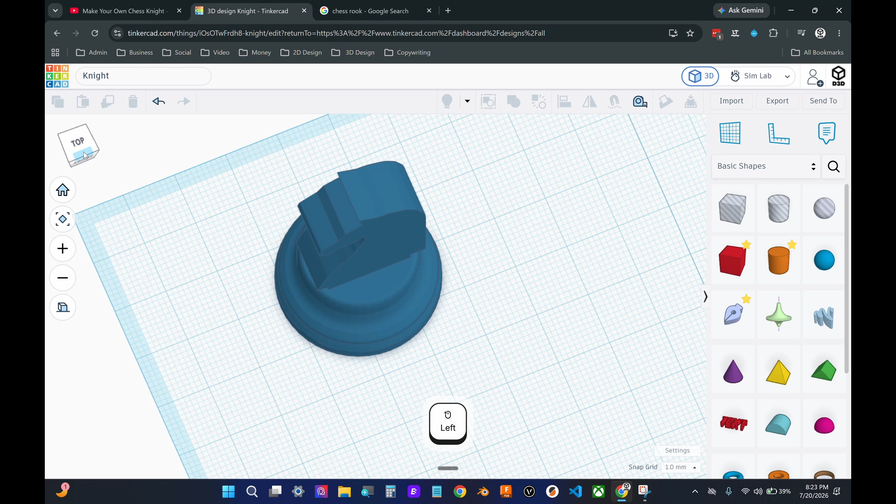And now let's come over to my knight design, because we want it to be roughly the same size. Go to a top view, grab the measuring tool, go from there to there. It looks like about 30 millimeters in diameter, so we can work with that.

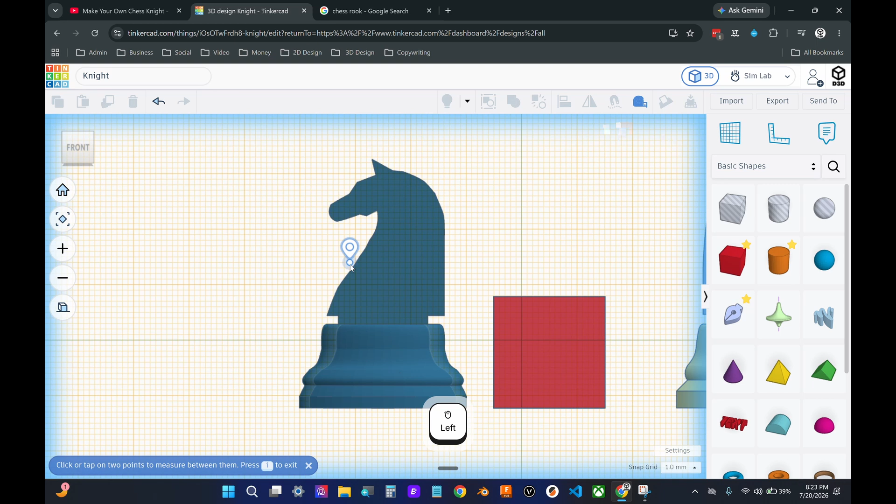And then I'll get a height measurement real quick, just changing the work plane and then measuring from roughly the top to roughly the bottom. About 45 millimeters, so 30 millimeters in diameter, 45 millimeters tall, and then real quick we'll grab just kind of what it is in the middle. 17, great. And now we're going to go to tinkercad.com.

If you don't have an account, you're going to have to log in, but eventually you'll get here and then you'll click create and then 3D design.

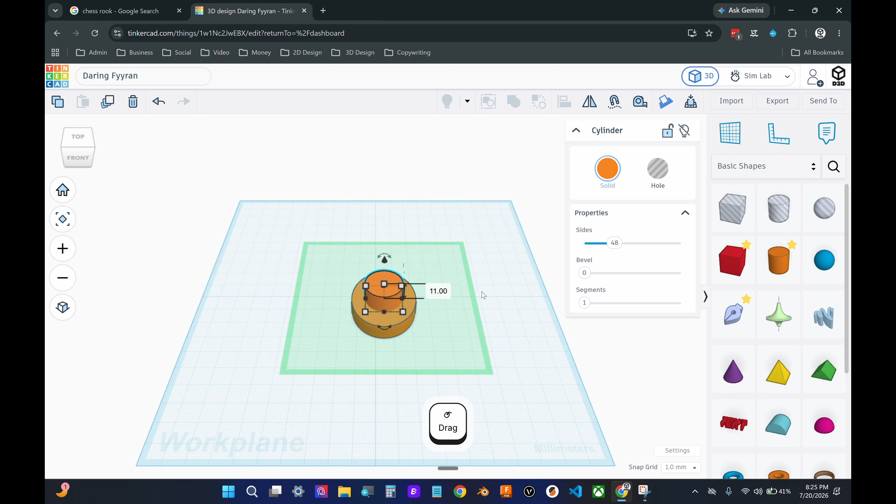So what you could do is you could just grab a bunch of discs and stack them on top of each other like this, and you'll get to a rook eventually that way, but there's a faster way that we're going to do in this video, and that is to use the Revolve Tool.

So we're going to throw the Revolve Tool on the work plane and then just start drawing our outline. The first thing you want to note is your base needs to be exactly half of what you want it to be eventually, because when we revolve it, it's going to double the diameter. So if the diameter right now is 15, that will give us our desired 30 millimeters eventually.

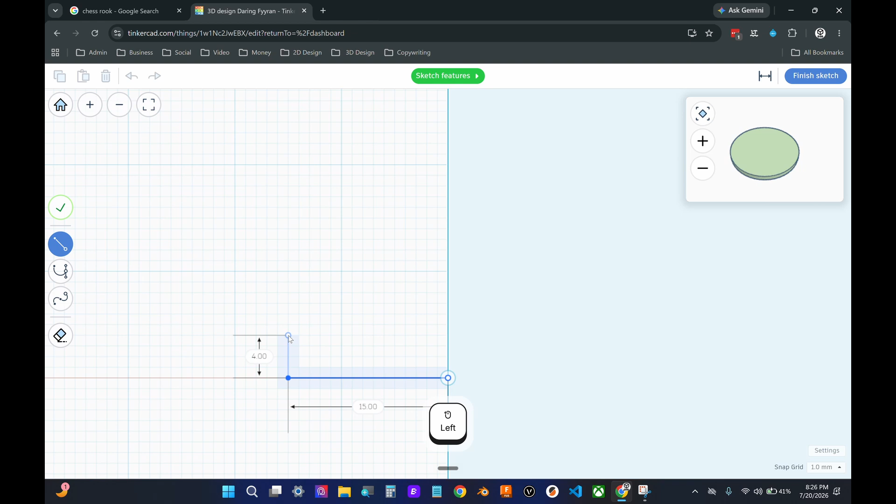So we'll click here, we'll drag up 4 millimeters and then over 2.83, and then out a little bit, back in a little bit.

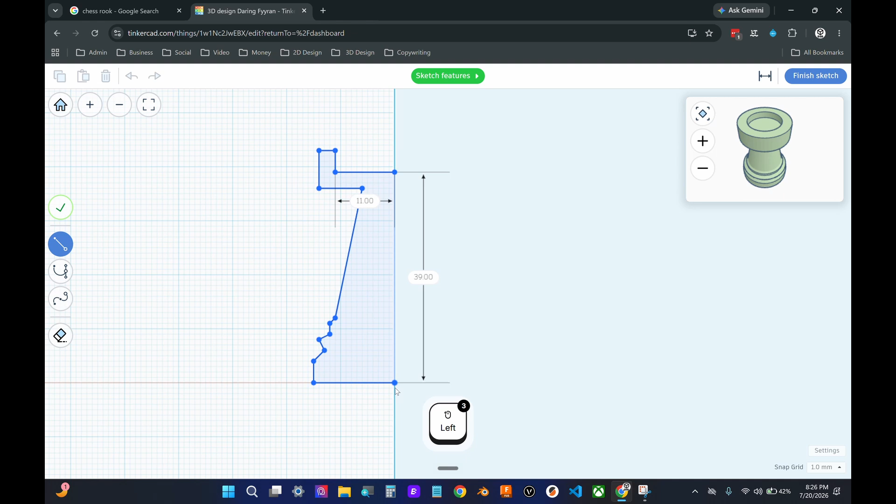And then we'll go out a little bit more and back in a little bit more, and then we'll just go up for a while, then out for a while, then up for a while, then over, because we could just do this here and then go down, but we want that crenellation, so we're going to go down first, then over, then down. Okay, looks like we're almost at our 45 that we're going for, so I'm just going to go ahead and set that to be 45, and then we'll drag the whole thing up.

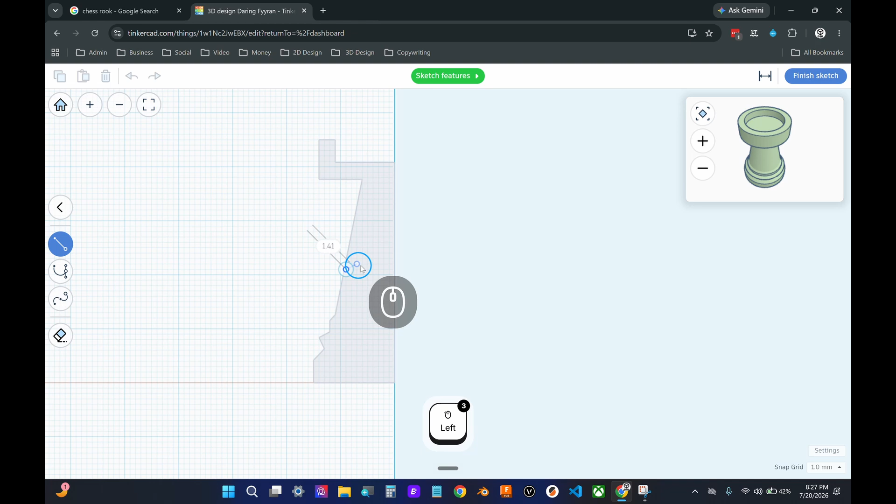So now we've got an eventual diameter - right now it's half the diameter, but an eventual diameter of 30 millimeters and an eventual height of 45 millimeters. And if we want to, we can grab another line to check how long this is. This is 9, times 2 would be 18. So yeah, we're roughly where we want to be size-wise.

This part looks a little funky up here, but that's okay, we can fix that. Okay, so I'm going to zoom in, select this line, and then we're just going to kind of go ahead and move some things around.

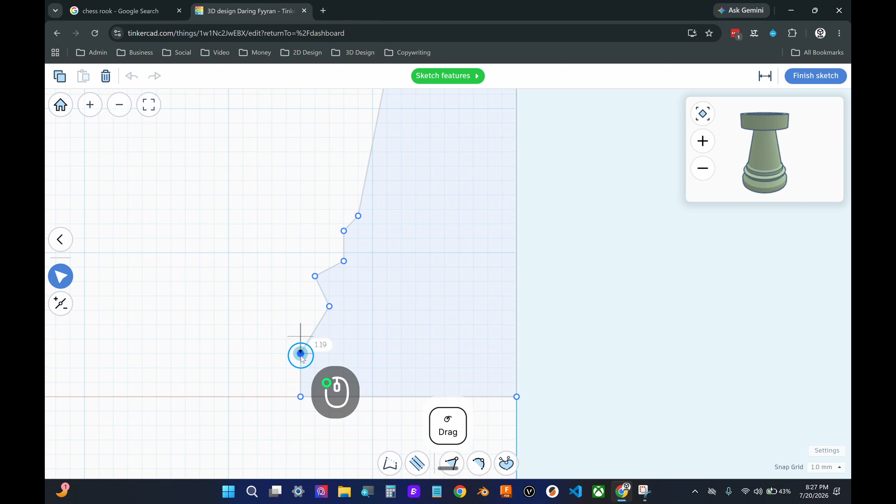I like this height actually, maybe I'll make it a little bit smaller. Yeah, we'll do that, we'll drag this over a little bit. Actually, I'm going to change my snap grid to 0.1 because it's easier for stuff like this. This isn't super scientific, it's just kind of what you like.

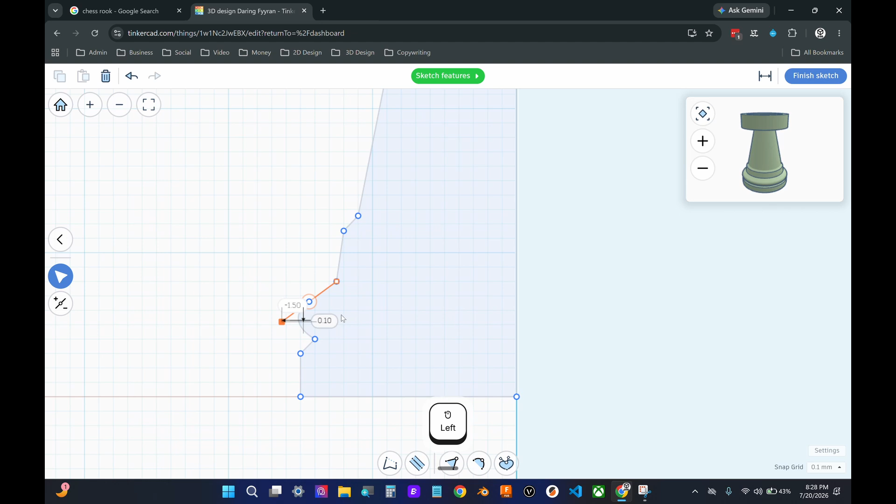And then I'll select this middle dot and I'll curve it by clicking this, and you can kind of grab the handles and change how exactly you want it to look. You could do this option where you can adjust each side individually, but for this I'm going to go with the ones that kind of follow each other. So just kind of mess with that until you like how it looks. You can always come over here and zoom in and look around. I'm liking how that looks.

Okay, so now we'll come up a little bit. Do this, mess with this a little bit.

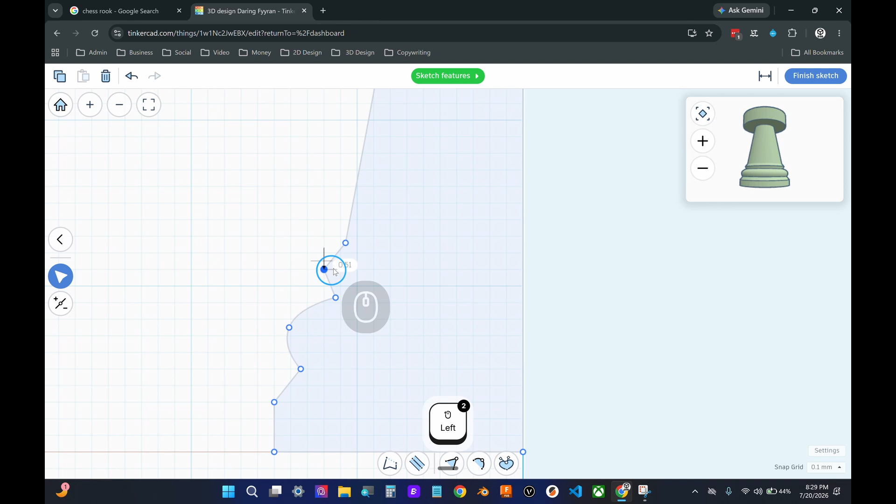This is like a smaller ridge from what I remember. Yeah, let's look at that. So this is a much smaller ridge, going more in the direction with the other diagonal bit of the piece. So we'll do this a little bit more, kind of fill this out.

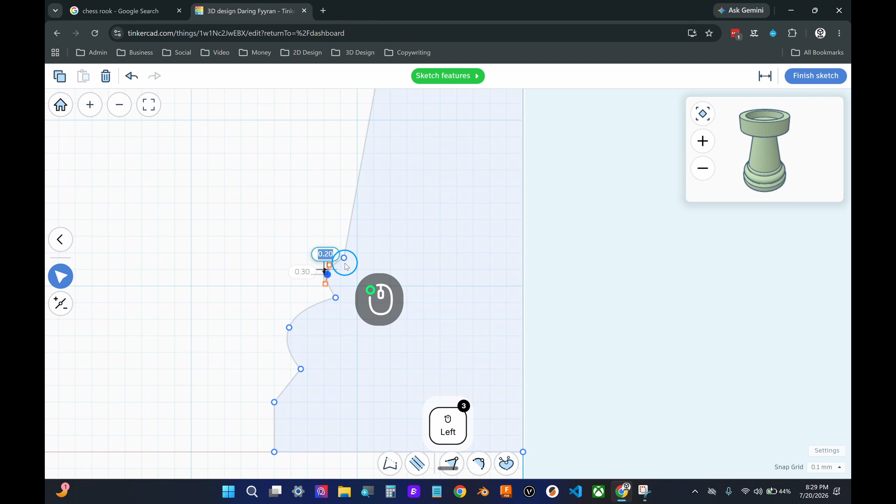Am I still liking how this is looking over here? Yeah, it's okay. And then round that out, move that in a little bit probably. Maybe move this piece in if I can grab it. Yeah, so that's looking pretty similar to what we've got right here, maybe a little bit more squashed.

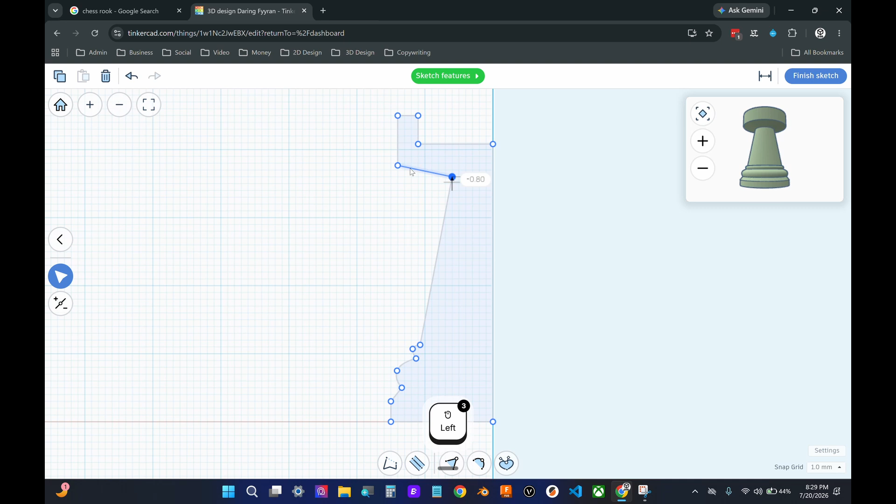Now we're gonna come up here to this part. I feel like this might be a little thin. Yeah, so I'm gonna drag this down. Actually, this is a time where I'm gonna switch my snap grid back to 1 so I can snap, and drag that down to match. Yeah, we're gonna go with this, and we can always edit it later.

Okay, so now there's some curved out bits right here. We've got a curve like we had down here, and then a kind of transition piece. We don't have the dots for that, so I'm going to add a few, drag that one out, change that one to a curve, drag it down a little bit, drag it up a little bit.

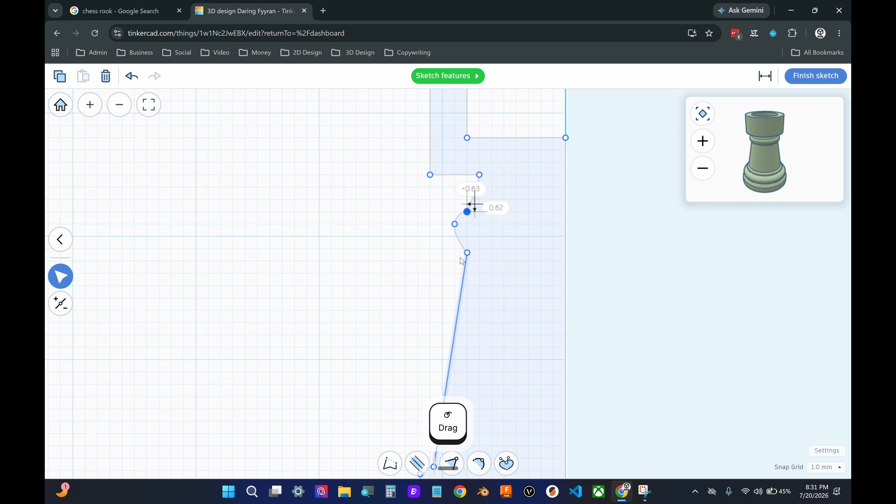I'm going to change my snap grid back to 0.1 for more precision. I'm actually going to move it all up because I think it's not far enough. I don't think I need that one, so I'm just going to select this and get rid of it. Can I just curve this like that? Yeah, let's do that.

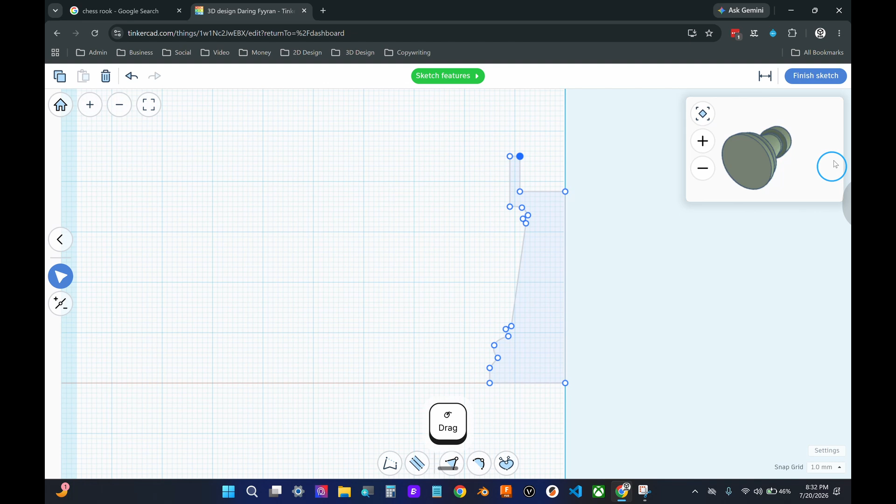Okay, so that's a revolve. Again, you can see the preview right here. I'm going to hit finish sketch now. So there's our little chess piece.

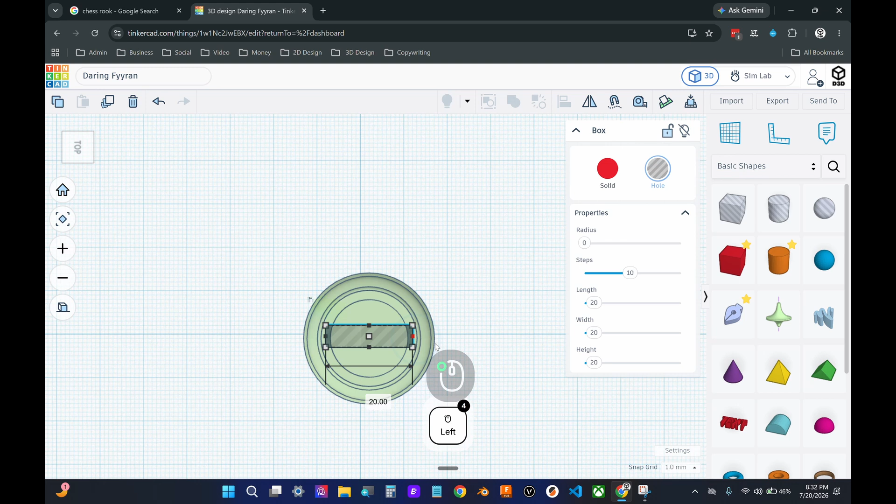Now we're going to add these parts right here. Let's throw a hole inside, and then we can scale this down to be 5 millimeters by, it's currently 20. And then you could align this, or you can just make it so long that it's irrelevant. And then here I will align it.

I'm going to hold shift, select both, and then align it along that axis. So this one looks like it has 6 pillars. I don't know if I want to do 6 or if I want to do just 4, so I just copied and pasted that.

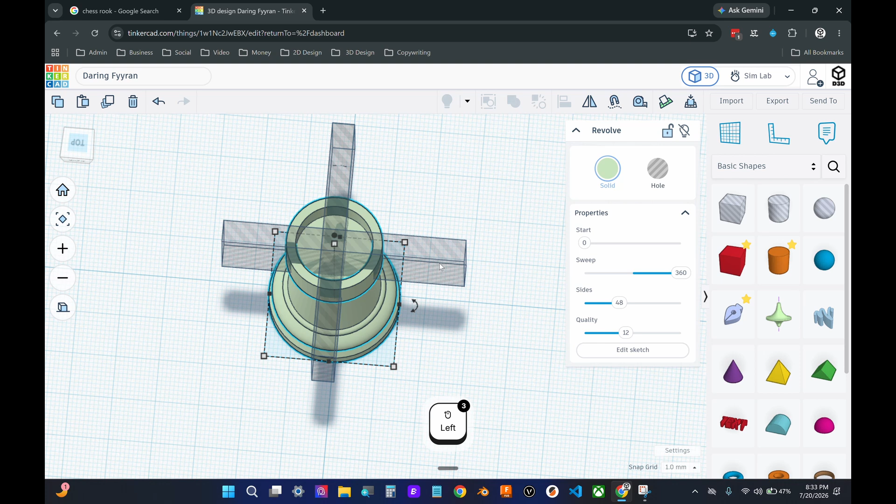So we'll see. I'm actually going to lock the position of my rook and then lock the position of this hole, and then I'm going to shift select both the rook and that hole, and align these like so. Okay, I like that, yeah. Okay, so we're going to unlock this.

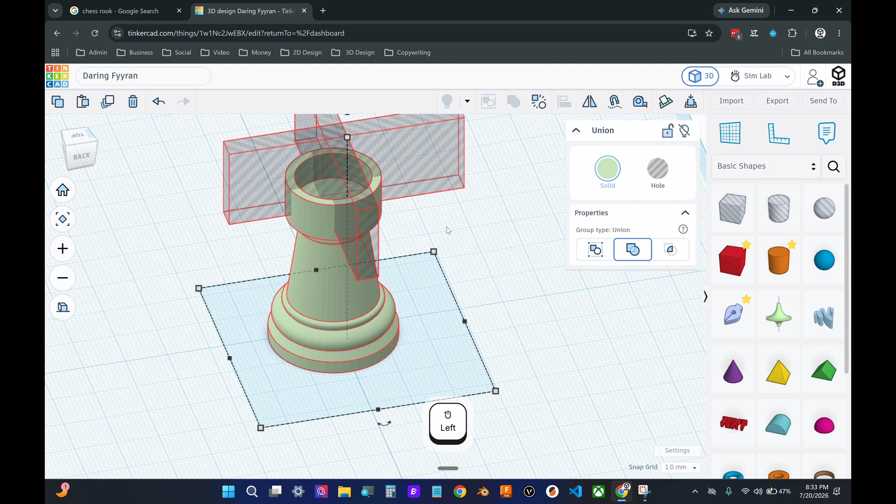Select everything like so, and then we want to do a union group. It's going to take a second to process probably because this geometry is a little bit more complicated than TinkerCAD's usually used to dealing with, because of the fact we used Revolve. It is taking a while though, so I'm going to ungroup it and then try again.

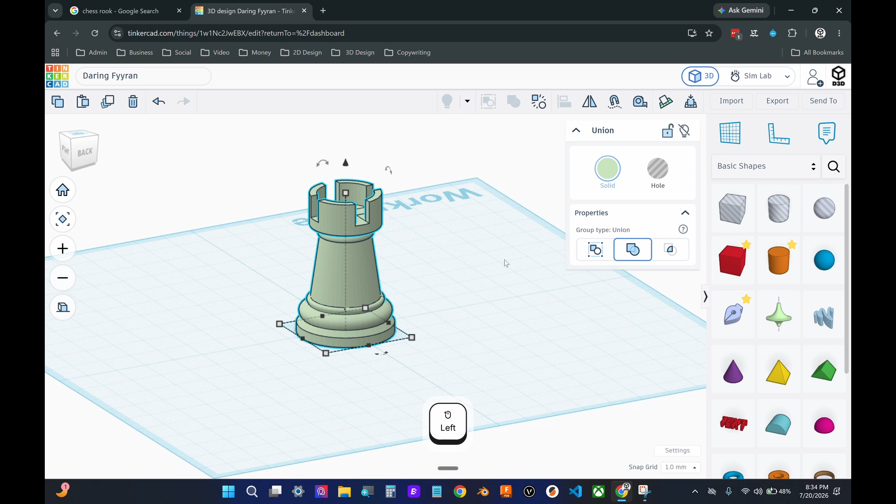Now you have your very own chess rook. Of course, if you want to go back in and change anything, you can just ungroup everything like so, click this, and then hit edit sketch, and go ahead and edit your sketch. Or you can also come out and edit your sweep, and then you can edit your sides and quality, and then your start position. Good job!

You just finished creating your very own Chess Rook completely for free.